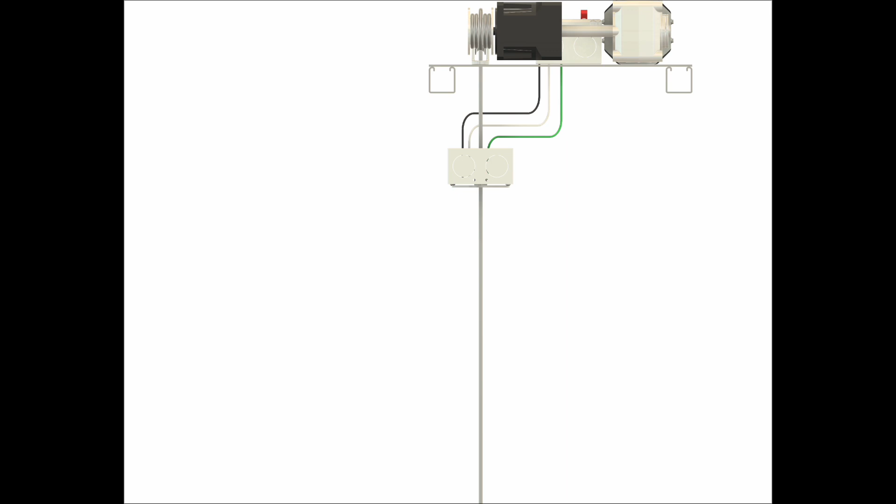Okay, today we are going to talk about a chandelier lift. Okay, so here is a chandelier lift or hoist. It is basically an electric winch that raises and lowers a chandelier to clean it, to replace light bulbs, or to replace it. And you have two separate electric circuits here, one for the motor and one for the light itself. That's why there's two switches.

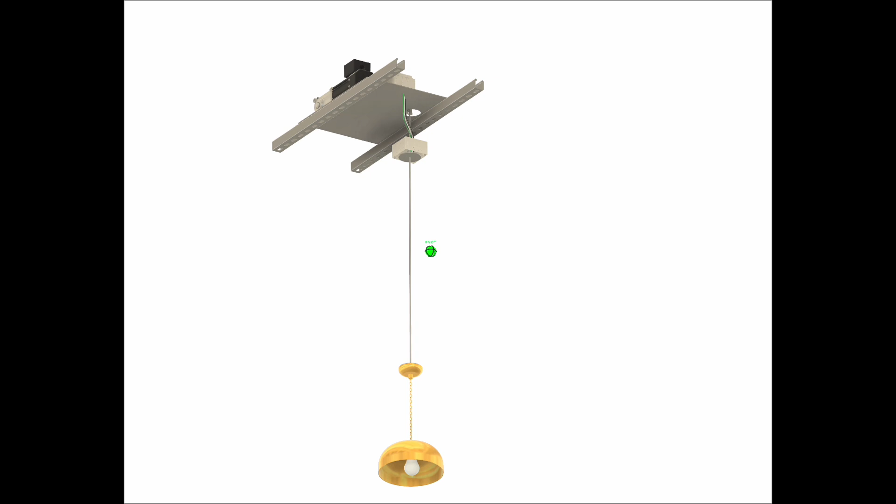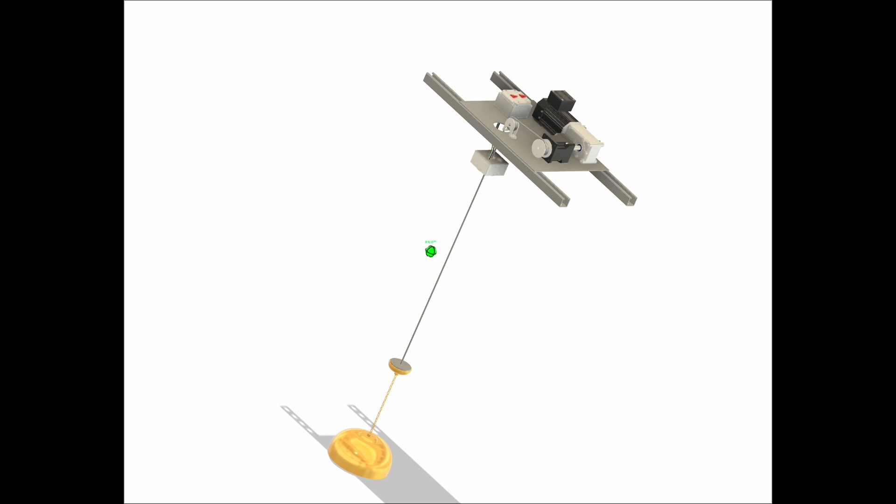And it mounts to some unistrut. The unistrut mounts to some structure up in the ceiling, so like up in the attic, for example. And there's contact plates. There's one up at the J box, and there's one contact plate down by the pendant light. And the way that works is when the light fixture is all the way retracted up to the ceiling, those contact plates make contact and the light will turn on. Looks like this.

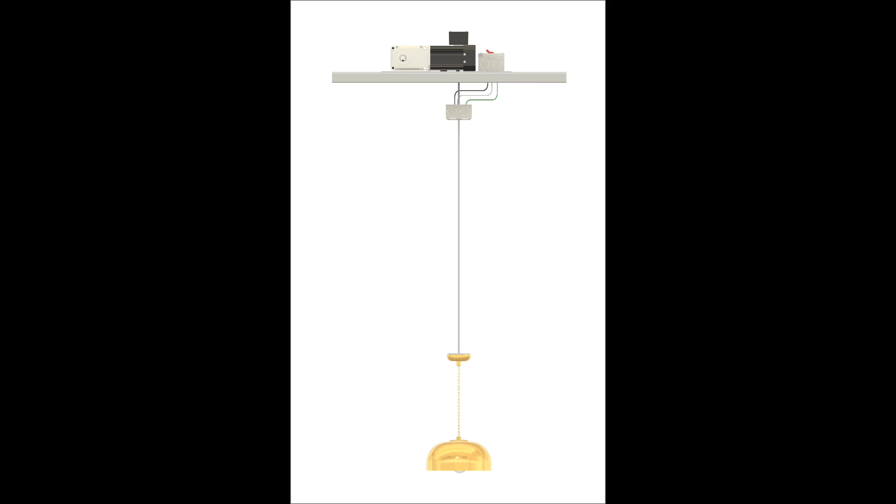However, when you turn the key switch on the wall, and the key switch is for security so people don't mess with this, and you lower the pendant light or chandelier all the way down to clean it or replace light bulbs, those two contact plates separate, obviously, and that kills the power to the light fixture. And once you're done, and you've cleaned your bulbs, replaced your bulbs, retract it back up, and the light will turn back on. These range in price anywhere from several hundred dollars to a few thousand dollars.